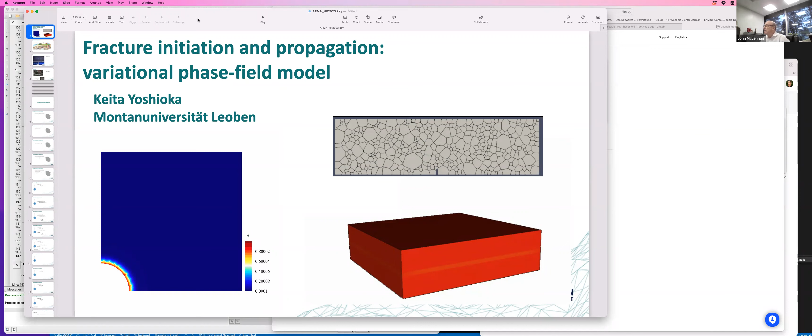I'll talk about fracture initiation and propagation using the variational phase field model. I suppose some of you, or maybe many of you, might have heard about phase field models for fracture. It's becoming very popular these days. It started in the computational mechanics community, and then it has been applied to hydraulic fracture these days.

So I added this word variational. The phase field model was originally developed as a numerical method to treat sharp interfaces like phase changes, and then it has been applied to fracture mechanics in the last 20 years or so. The phase field is a numerical technique to regularize sharp interfaces, but the other aspect of this methodology is about this variational approach.

So we are talking about energy minimization. I'd like to start with this slide. As I was introduced, I was in the oil and gas industry for many years. Hydraulic fracturing is a technique to extract hydrocarbon, or we also apply it to geothermal reservoirs.

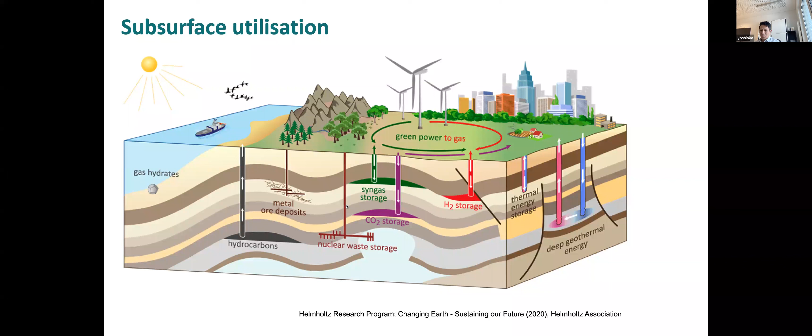In hydraulic fracturing, in hydrocarbon reservoirs, for example, we almost always know where fracture will initiate, because that's where we put packers, or where we perforate. So that's where the fracture will initiate. But for energy storage projects, for example, if we want to avoid fracturing, first of all, we don't know where fracture is going to initiate. And if you want to assess the integrity or safety of such a project, our simulation tool should be able to predict the fracture initiation. So not only fracture propagation, but fracture initiation is one of the focuses of my talk today.

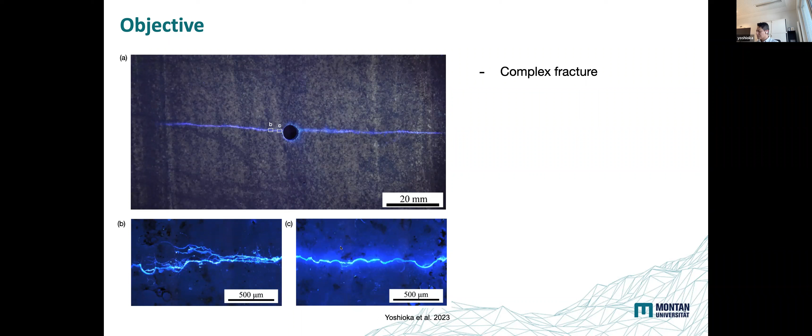So then we go to objectives. The first objective is I want to develop a simulation tool that can simulate complex fracture behavior, such as fracture turning, branching, or merging. This is an experiment, a hydraulic fracturing experiment we have done, where we visualize how the fracture behaves and interacts with the grains. Such complex fracture behavior is something we want to simulate.

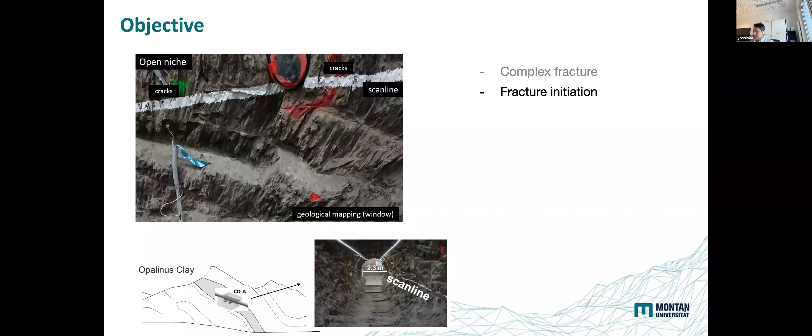Okay, so then let's talk a little bit about continuum fracture mechanics.

So we start with Griffith fracture criteria. This criteria was proposed in 1921. So if we have a single crack propagation along a known path L...

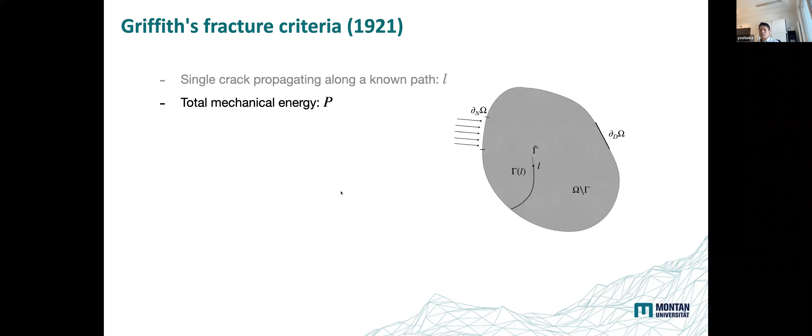We can define the total mechanical energy P, and Griffith defines the energy release rate as the released energy when this line crack propagates by a small amount. So we take a derivative of this total mechanical energy with respect to the crack length - that's the energy release rate.

And then the material has some resistance to fracture, known as fracture toughness, which I denote as G of C. This is the material's resistance to unstable fracture propagation.

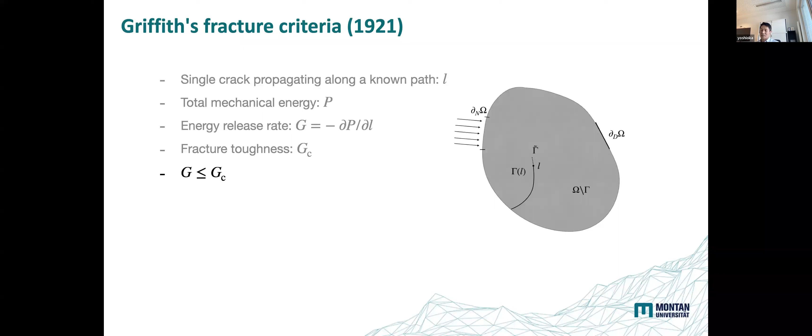Griffith criteria essentially states that the energy release rate has to always be less than or equal to the critical energy release rate, or the fracture toughness G of C. So this is the Griffith fracture criteria, and this is the basis of our continuum fracture mechanics.

It's more common to use a stress-based criteria rather than Griffith criteria - also known as Irwin's formula. So this same Griffith criteria, if we convert it to stress, this is the equivalence.

So P is the pressure within the fracture, and the energy release rate - we can calculate it from the loading and the geometry of the fracture. R0 is the initial radius of the fracture.

And then when this is equal to the square root of E times GC, or KIC, which is the fracture toughness, that's when the fracture propagates. So then we can solve for the fracture pressure - this is the critical pressure.

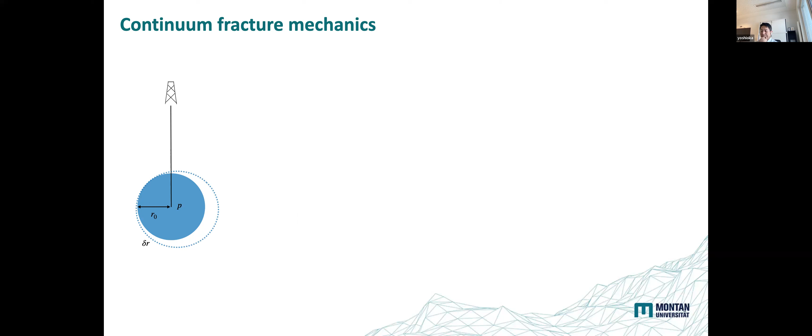Another difficulty of the Griffith criteria is when we have complex fracture paths. In the previous slide, I assumed this penny-shaped crack would propagate evenly. But what if the propagation is not even?

If you have uneven propagation of the fracture, then we don't have the closed form expression for this energy release rate anymore. We have to compute this energy release rate with some other means, such as J integral and so on. This makes the complex fracture propagation difficult.

A simulation of complex fracture propagation is difficult because if we allow fracture to propagate freely in a complex path, then we have to evaluate this energy release rate accordingly. And this evaluation is not so straightforward if we consider many possibilities.

So this was the Griffith criteria. And in 1998, around 20 some years ago, Francfort and Marigo proposed the so-called variational approach. The Griffith criteria is actually nothing but the minimum of this quantity. Griffith criteria states that the fracture propagates when energy release rate equals G of C, but this is nothing but the minimum of this mechanical energy plus GC times L. So if we take a derivative of this quantity with respect to L, then this is what we get.

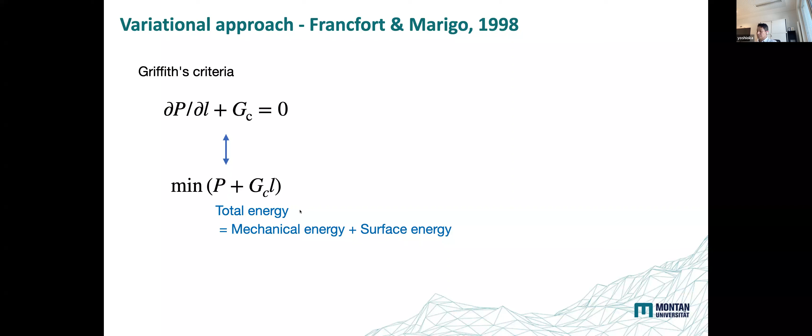So then we can generalize this Griffith criteria. We can recast the Griffith criteria as an energy minimization problem. So if we define some total energy, we want to minimize this energy with respect to displacement and the crack set, and how the total energy should be defined. The total energy we can define as a sum of the mechanical energy and surface energy.

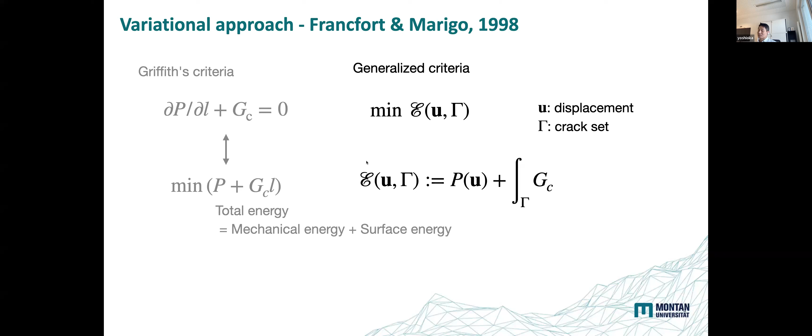In Griffith criteria, we are only looking at single crack propagation, but we don't have to limit ourselves to just a single crack, we can look at all the cracks available in the domain. So this is just a collection of all the cracks, and this gamma represents a crack set. So then we try to find the displacement U and the crack set gamma that minimizes this total energy E. That's a generalized Griffith criteria, so to say.

So then we go to phase field. Phase field is essentially regularization of the sharp interface. So we go from the discrete representation of the fracture to a diffuse representation of the fracture.

So this is the problem we have. We have some domain omega, and then we have some crack set gamma. And then we want to find displacement and the crack set. We want to find U and gamma that minimizes the total energy in this system.

But in terms of numerical implementation, this is not so easy. This gamma, or the crack set, is the discontinuous surface, the discontinuity. And if this discontinuity evolves, then it brings all sorts of difficulties in terms of numerical simulation, right? Because how do we honor this discontinuous surface with elements and so on?

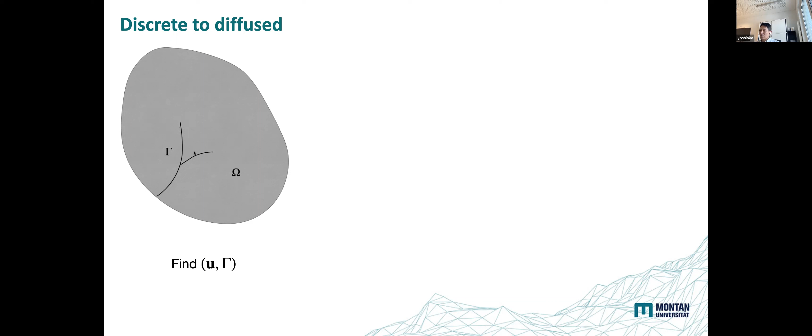So what phase field does is regularize this sharp interface. The phase field variable, we call it V, and this V replaces the sharp interface. So the sharp fracture becomes sort of a blurred image of the fracture. Instead of representing the fracture with a binary system, either 0 or 1, fracture or not fracture, in the phase field we represent fracture in a continuous manner.

So in our definition, when V is 0, that's where the material is fractured, and when V is 1, that's where material is not fractured. But this V changes smoothly from 0 to 1, from fracture to non-fracture. It changes smoothly, so there's a transition between 0 and 1.

So what are we doing? What equations are we solving? With the generalized Griffith criteria, we can write the problem as follows: we want to minimize this energy, which is a sum of the mechanical energy and the surface energy. The mechanical energy is the stress times the strain. This is the discrete problem, and we want to minimize this total energy with respect to displacement and crack set gamma.

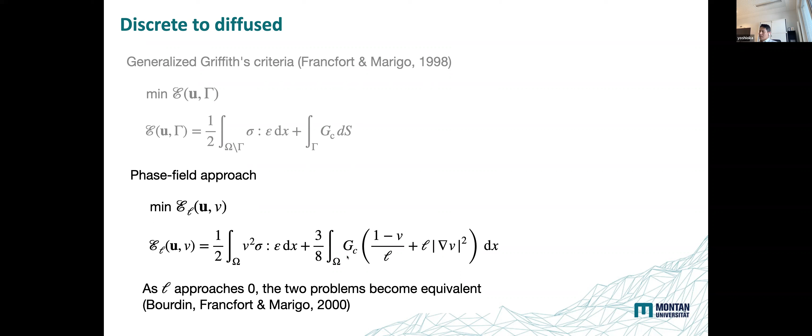This length scale parameter controls the transition of the phase field variable changing from 0 to 1. As L approaches 0, these two energy minimization problems become equivalent. So that's what this form of the functional guarantees. And when we extend this phase field approach to hydraulic fracture, we have to add one additional term.

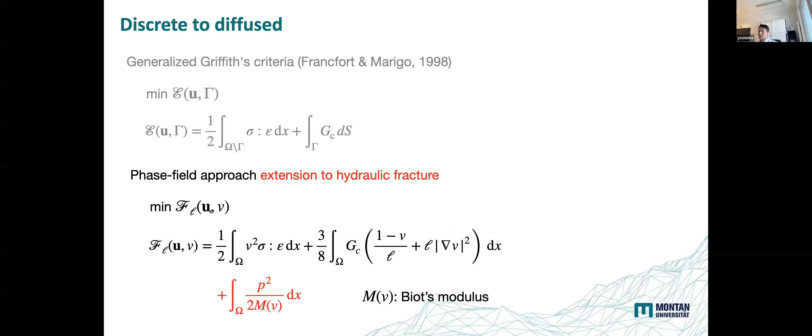That's the fluid pressure effect. So this term is given by here. I won't talk about too much detail, but this Biot's modulus is also a function of the phase field variable. So by minimizing this total energy, we can solve for the displacement U and then the phase field variable.

The remaining variable we wish to find is the fluid pressure. And for fluid pressure, we use Darcy's law. This is the permeability tensor, and then the permeability tensor is enhanced using the cubic law. Well, if you watched last week's webinar, this approach may be obsolete, but I still use it.

So W is the fracture aperture, and as the fracture aperture changes, this permeability is enhanced, and this permeability is given as a full tensor. So I also want to know the crack normal direction. That's how we get fluid pressure.

Now I will show you some verification cases. The phase field representation of the fracture is essentially this. We have a discrete fracture, a line fracture of 2A, and using the phase field variable, this fracture will look like that. The red color represents when the phase field value is 0, and blue is 1.

You see that the phase field variable transitions from 0 to 1. By representing fracture in this diffuse manner, we want to know whether we still can recover explicit properties, such as fracture aperture, fracture length, or fracture critical pressure.

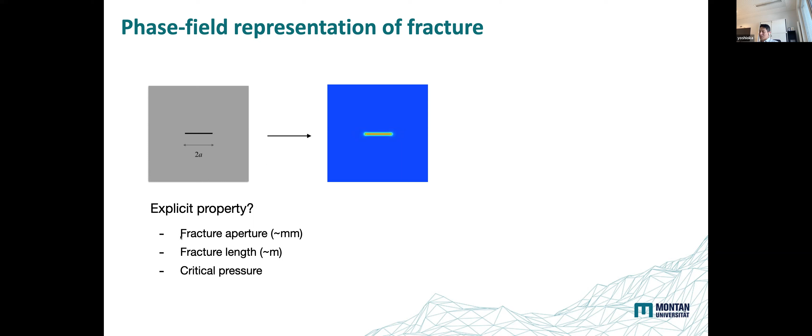We also know that the fracture aperture is on the order of millimeters, while the fracture length is on the order of meters. This huge anisotropy is actually what makes the computation of fracture difficult, but we have to make sure that we can recover these explicit properties.

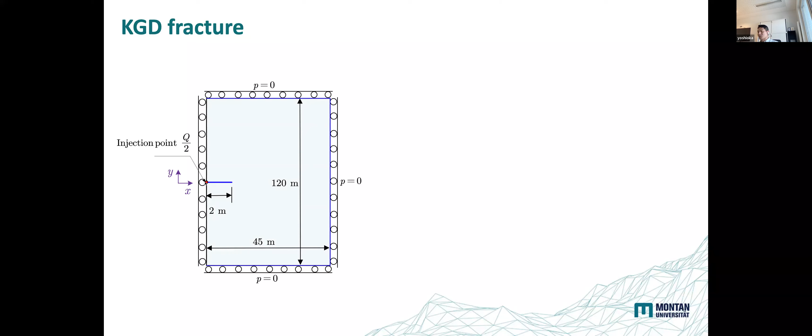So we apply our model to KGD fracture. We have plane strain, and an injection point here. This is just half of the domain, and we have a line crack. Here is our verification result.

But it's not a perfect match, and this is due to the finite reservoir permeability. In the KGD solution, the permeability of the reservoir is 0, but we could not really assign zero permeability because of numerical difficulty. That's the reason for the slight discrepancy between the analytical model and our simulation result.

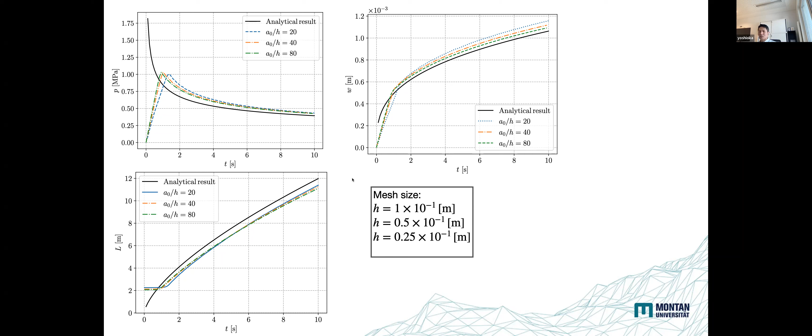So that's the verification example. Now I will show you some examples, with focus on fracture initiation.

The first example is a hydrofracturing experiment in rock salt: just a cube of rock salt, and we drilled a small borehole. My simulation is just a quarter of this rock salt, and we put some casing in this borehole, and the lower part of the borehole is open. This is where we inject fluid, and we applied two different loadings.

In the first case, obviously the minimum stress is in this direction, and this bright color shows the developed fracture after the experiment. We expect the vertical fracture to develop in this experiment. In the second case, the vertical loading was the minimum loading, and we expect the horizontal fracture to develop.

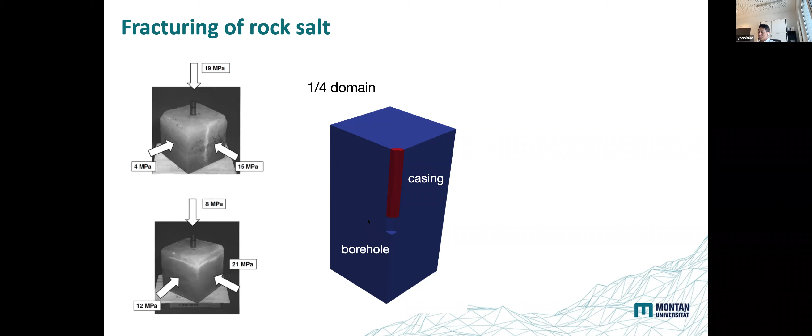In these two simulations, we did not put any initial fracture. We just increased the pressure and let the phase field develop according to the external loading. This is the result from the first simulation.

On this face, we apply the minimum loading, and we expect the vertical fracture to develop. This is the fracture development.

In the second case, the vertical loading was the minimum. So we saw this horizontal fracture development, and the initiation of the fracture was picked up. We did not specify small horizontal fracture or vertical fracture in the earlier case. It was initiated just at the bottom of this open hole section, and this result was based on the quasi-static or successive energy minimization.

This example is about desiccation fracturing. This was an experiment: a fully saturated plaster placed on top of a frictional plate, which has a very high friction coefficient, and then we let this plaster dry.

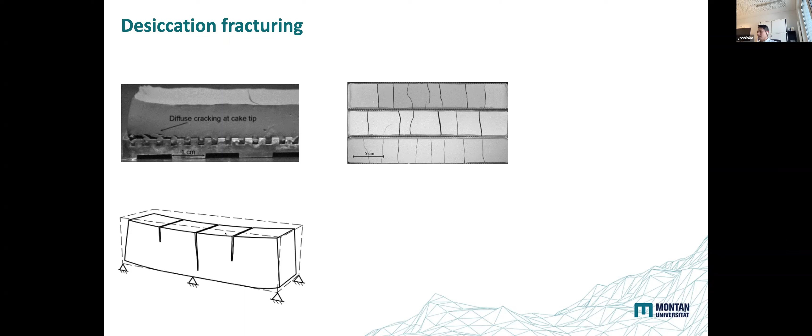So then we did the simulation for this. It was a very simple simulation in 2D, and we only simulated the left half of this plaster. We fixed the bottom of this plaster, applying half symmetry on the right.

Water in this plaster evaporates. We let water evaporate from these surfaces.

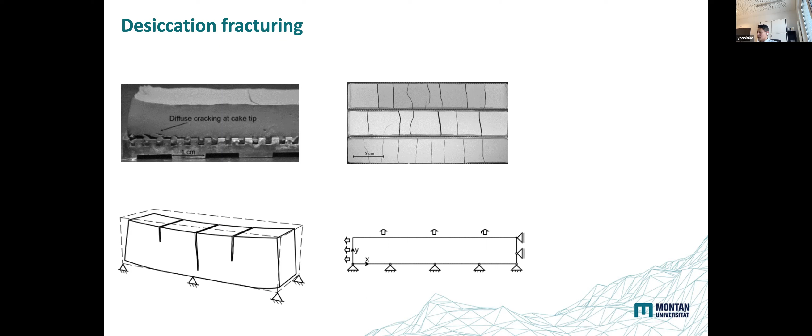This is the simulation result of the fluid pressure first. As you see, near the boundaries it developed negative pressure. That's when it loses water saturation.

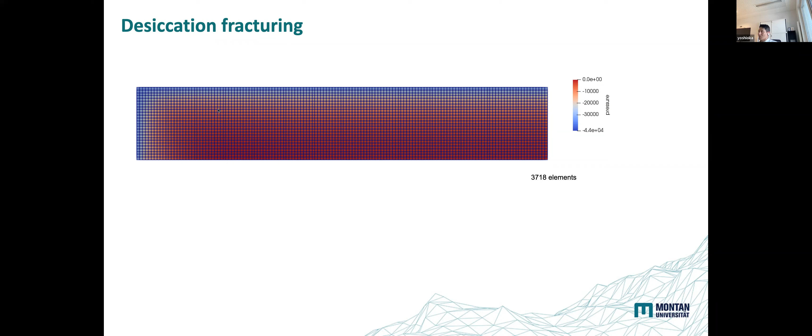Also, as you see, we use a very coarse mesh, only 3,700 elements, all structured elements, and material properties were homogeneous. Meaning in this domain there's nothing to trigger any structure - the mesh is uniform, structured, and material properties are all homogeneous. So there's nothing that can trigger fracture development.

This is how the fracture developed. First we saw some fracture development on this lower bottom corner, then some vertical cracks started developing, and then we saw more vertical cracks. At some point it reached a saturation point of the cracks, and then we did not see any new crack development.

But all these nucleations of the fractures were picked up based on energy minimization.

Another example: this is again desiccation cracking, but we applied it to this tunnel system. This is the cyclic deformation experiment I showed you in the beginning. The humidity in this chamber was controlled and cyclically changed.

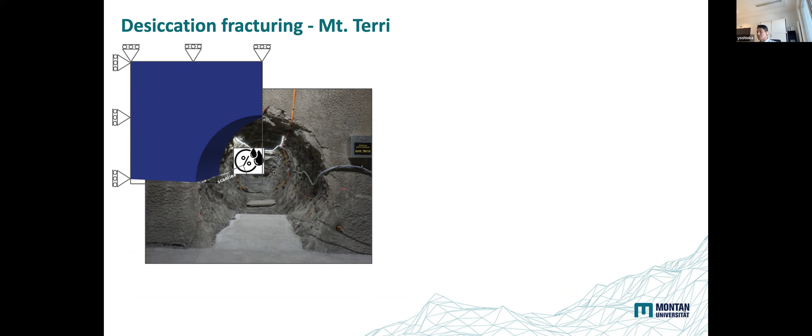As a result - this is just a simulation result - we simulated that the crack will develop like this.

I should have put some pictures, but this looks very much like what you see on the ground after a rainy day. This pattern of the crack looks very similar to such a desiccation crack.

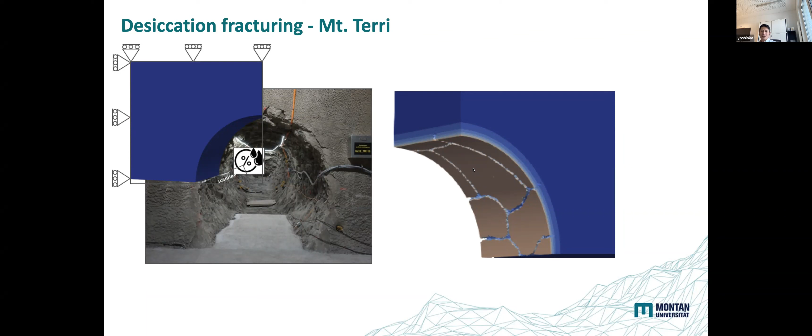All right, I have one more example I would like to show, and this is about hydrofracturing. Here in 2D, I simulated the hydraulic fracture interaction with a natural fracture.

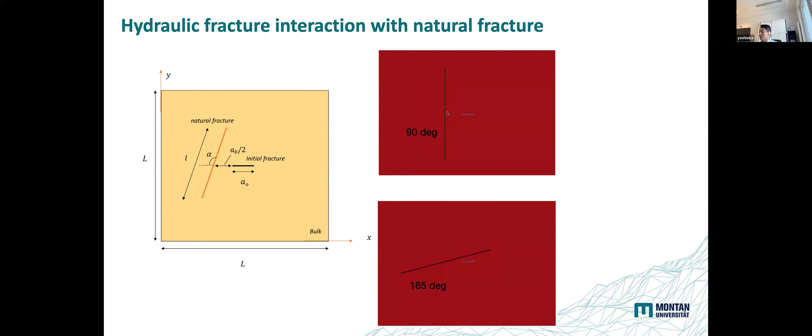So for each angle I use two different strengths of this natural fracture. The actual values aren't very important, but let's say one is strong and the other is weak. So this is the strong natural fracture case, and this is the weak natural fracture case.

In the strong natural fracture case, the hydraulic fracture just ignores the existence of this natural fracture, bypassing it and propagating straight. When we reduce the strength of this natural fracture, it branched on this natural fracture, splitting into two ways and following it.

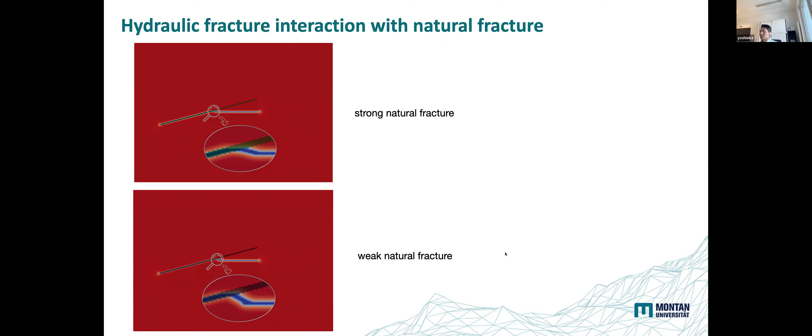When we change the angle, so the fracture approaching angle is smaller in this case, with two different strengths of the natural fractures, strong and weak, in both cases the hydraulic fracture propagated along this natural fracture. Okay, so that's all I have for examples.

Then I'll just give you some of my conclusions. A variational phase field model is an appealing predictive tool for initiation and complex fracture propagation simulation. This approach is gaining popularity and is extended beyond elastic brittle materials, but it just started coming to this subsurface field or hydraulic fracturing field, so we still have a lot of things to do for geomaterials.

Okay, so with that, I conclude my presentation, and I'd like to acknowledge my collaborators. I'm happy to take any questions you might have. Thank you very much.

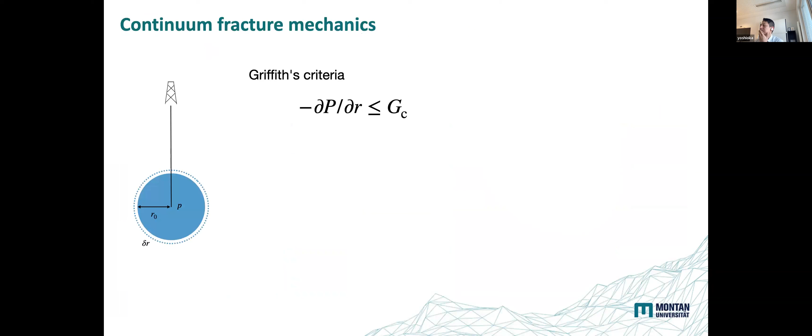Yeah, so the fracture aperture, right? So the fracture width, we recover fracture width from the deformation. So is it coupled directly with the phase variable?

No, it's not coupled. The phase variable tells us whether the material is broken or not broken. But the fracture aperture, even if the material is fully broken, meaning the variable is completely zero, there could be a case where the fracture is completely closed, and then the fracture aperture can be zero. So the fracture aperture comes from the deformation, but the existence of the fracture comes from the phase field variable. The phase field variable gives us an indicator, and the actual value of the fracture aperture has to come from the deformation or the displacement.

Okay, great. And Uno has a question, and his question was, do you use adaptive mesh refinement within the framework of the phase field model? He also says it was a great presentation.

Yeah, so about the adaptation, no. In our model, we don't have the mesh adaptation. If he means dynamic adaptation, no, we don't have it. We'd like to have it, but we just don't have it.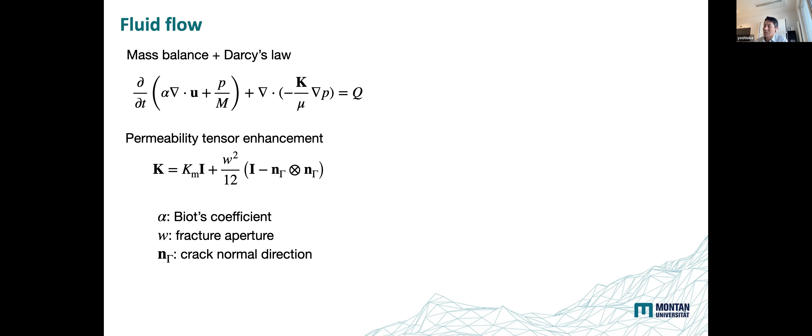So okay, maybe if I go to the very first slide on this example. So this is also a nucleation of the fracture, and as you see, the damage is initially developed uniformly, everywhere there's a uniform damage.

But in this evolution process, at some point this uniform damage becomes unstable, meaning that if we compare two states of energy, one with localized damage and the other with homogeneous uniform damage, the localized damage has a lower state of energy, which is more stable than the uniform damage state. That's when the damage starts to localize. So initially damage is uniform, but then at some point it starts to localize because uniform damage is no longer stable.

Okay, hopefully that answers the question. I think it did, yeah.

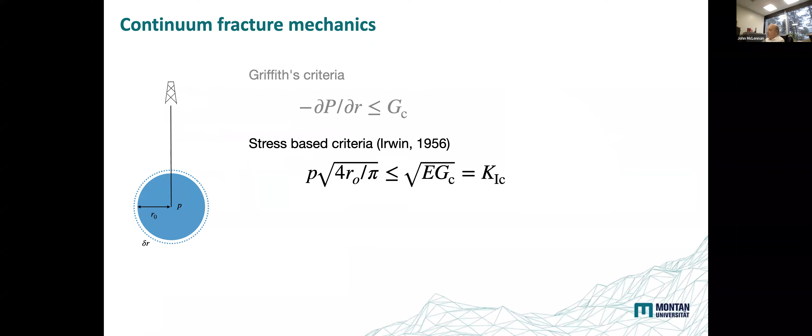So there's another question from Ed, and he's wondering, in the desiccation problem you showed, the rectangular configuration, you started with a uniform mesh and uniform property. He's trying to understand what drives the nucleation, and would you see a different nucleation pattern if you ran the simulator in single versus double precision?

So what drives the nucleation? Yeah, so what drives the nucleation, I think, is the same as before. And then the second question, if we see the same pattern, that goes to uniqueness of the crack, and that depends.

So again, this is the energy minimization problem. Our implementation does not guarantee to find a global minima. We can only find local minima of the energy. So the uniqueness is not always guaranteed.

Let's say the number of cracks will not change. So if we have two vertical cracks, then two cracks will be the solution. But the exact location of these two cracks could be a little bit different. And if the energies of these two slightly different locations of two vertical cracks are almost the same, we cannot guarantee to find the global minima always. We can only find the local minima. So for the nucleation process, that can happen.

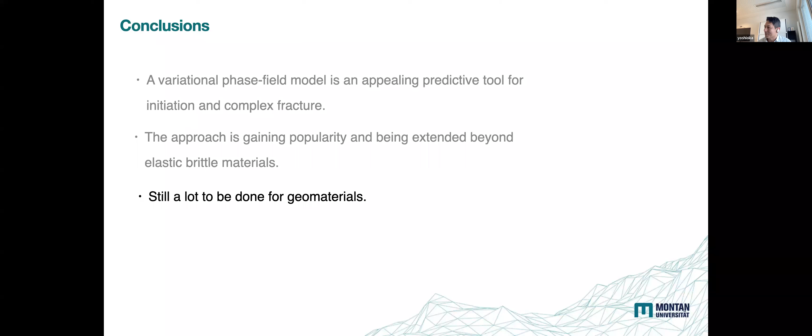Thank you for the question, and I should have mentioned this is open source code called OpenGeosys. I am a part of the development team. I should have put some link or something, but I did that in the acknowledgement. So OpenGeosys is the name of the software, and it's maintained at the Helmholtz Center in Germany.

Thank you for the presentation. Does the phase field interface correspond to the actual fracture width, considering the variation of the fracture width from its source? So, no. The phase field can be considered as a special model of the damage mechanics.

Or non-local damage mechanics. As is the case in damage mechanics, the fracture is diffuse over multiple elements, and the actual fracture is somewhere in this multiple elements. So that's the difficulty of the fracture.

The fracture aperture is on the order of millimeters, and using the damage mechanics or the phase field model, we represent this millimeter aperture of the fracture using multiple elements, which goes to orders of half a meter or so. So the actual fracture is somewhere in there, but we should not take this diffuse fracture as the actual fracture. The actual fracture is somewhere in this diffuse fracture, and there are some people who research how to recover the actual fracture path, identifying the real fracture path from this diffused image. It's just a mathematical or numerical representation of the sharp fracture.